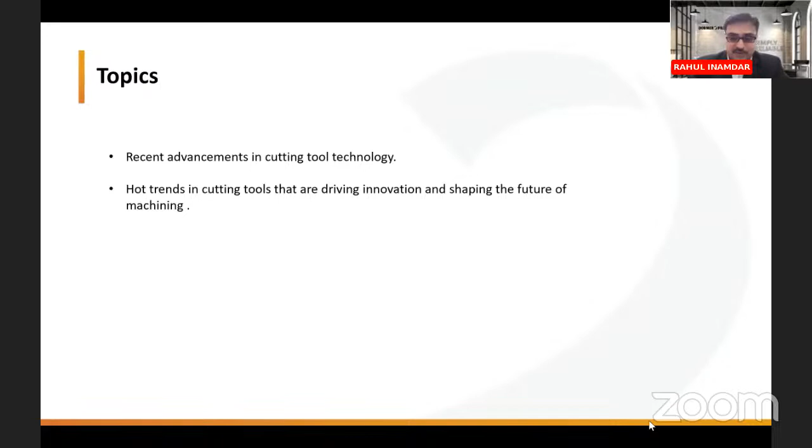I've been listening to our members who have already joined and co-panelists discussion, and it was so healthy basically when it comes to the Indian industry, growth and advancement. Today, without taking much time, I will talk a bit on the recent advancement in cutting tool technology, and also some of the hot trends right now ongoing in cutting tools hand-in-hand with machine tools, Arshad, with you.

When it comes to these two topics, let me directly jump into the advancement in cutting tool technology. Subhajit, what I see and what we all see right now, specifically when it comes to this zeitgeist of Atmanirbhar Bharat, Make in India, and also globally after post-COVID, industry really seeks development and innovation in the cutting tool, of course in the machine tool, but definitely in the cutting tool. When it comes to innovation or development, advancement in cutting tool comes down directly to the heart, and the heart is the insert, the carbide.

When it comes to the carbide, it is a great development from the historical age, when it comes to the grade, right from high-speed steel. There are three main desirable properties and factors which everyone looks upon for the cutting tool or for the insert: it should be high wear resistant, it should be higher in toughness, and at the same time it should have high hardness at high temperature, that means hot hardness. So right now in the industry, in the metal cutting world, what is happening?

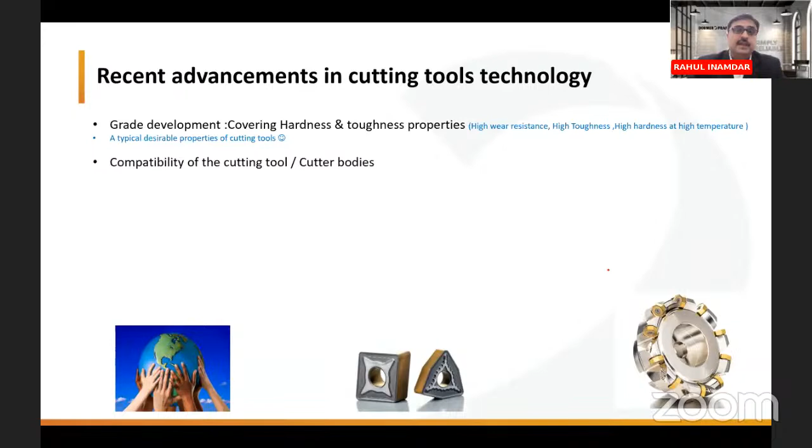But this advancement, this development and innovation, comes with one single cutter body - cutters, economical face milling, multi-edge as well, maybe 43-degree, 45-degree approach angle, but the same body contains square insert as well. That means we are talking about shoulder milling, multi-edge. So a single body contains a different shape of inserts, including the wiper cutting edge, the surface roughness values as well. This is another advancement.

When we say sustainability, then again energy saving is a topic now - kilowatt hour per unit. When the machine starts, when machining starts, the unit starts consuming kilowatt hours. This is what the Bureau of Energy Efficiency, BEE, data shows - in India, the power consumption in the manufacturing industry, when it comes to the production facility, is 83%.

83%, huge. And when it comes to the general facility in India, it is around 17% of the consumption. So 83% for production facility, isn't it too high? Yes, it is high. We need to do something. When it comes to machining, metal cutting, cutting tools, we have to come up - the tools now have innovation with low cutting force tools, different chip breakers, applying machining strategies with the help of CAM and machine tool manufacturers, optimization in cutting tool parameters.

This again correlates with grade development - high temperature withstanding capacity of the grade, the toughness carrying capacity of the grade, no matter turning, milling, or drilling. And then technological coatings as well, the geometry for the drills and so on, and approach with productivity. When I say approach with productivity, that means quick change, faster things - modular tooling. This is the advancement in cutting tool technology right now that we need to reduce the kilowatt hour in metal cutting.

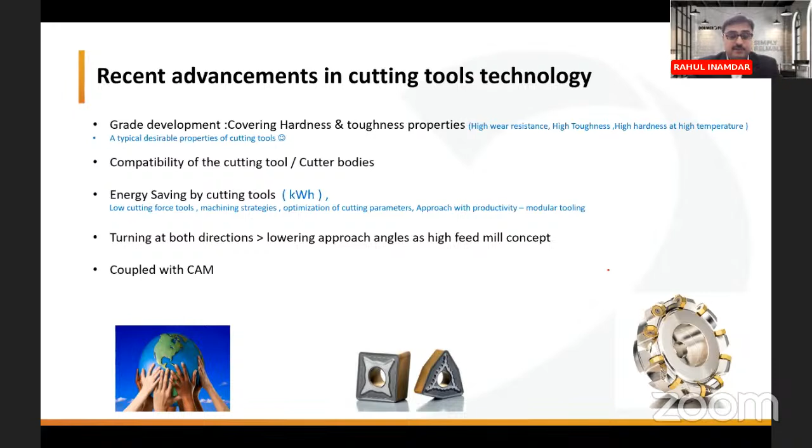Also, what advancement I see in metal cutting tools is again the micro drilling. Nowadays we are talking about the chips and micro drills and so on. And when it comes to micro drills, the machines and also the drill breakages as well we see.

What happens if we increase the feed rates or higher thrust force in the drill? So it comes with WC, tungsten carbide and cobalt based drills, which can carry higher temperature, that means higher cutting speeds, faster rate of drilling, double or triple the rate of drilling. Also getting the positional accuracies, the roundness, the geometrical accuracies, desired dimensional accuracies as well, and that too with the faster rate of drilling.

So typically what I see is the grade development, compatibility of the tools and cutter bodies as well in milling. Again, kilowatt hour reduction, that is a need.

I still remember in 2011, Japan hit by a high tsunami, and that had a blackout in Japan, in the main city of Tokyo. And the concept came from there. How about we reduce the units? How about we save energy, the power? And then it evolved in the cutting tool as well. And now it is under innovation, under advancement as well, even in small drills or carbide inserts.

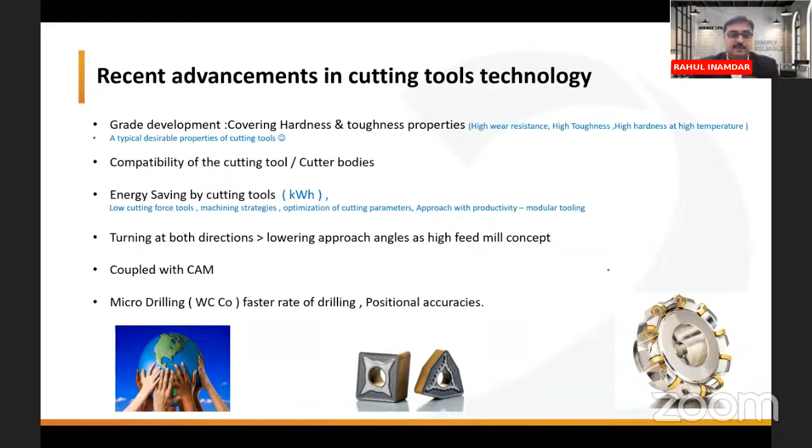Going forward, if I talk about some hot trends, of course panelists touched upon this. But again, Internet of Things integration, IoT, Industry 4.0, digitalization, that is very, very now coming up.

AI, the real-time feedback. A boring bar is doing boring, finished boring. But what we do not know outside the machine, the operator doesn't know what is happening with the surface roughness value. The operator doesn't know what is happening with the bore size, with the tolerances, the upper and lower limits, the CP/CPK values. We don't know.

This now comes with Bluetooth enabled sensor cutting tools, and this comes with a mobile app. Very easy, anyone can put it and check on the mobile app, check on the iPad or tablet and so on, or the monitor.

And then one can really monitor the operation, like boring. What is happening about the bore size? What is happening on the temperature? Is my cutting edge worn out, about to wear out? Then the sensor alarm will come up, and that means very high reliable machining. So this is what we say, trends are coming up when it comes to innovation and shaping the future of machining.

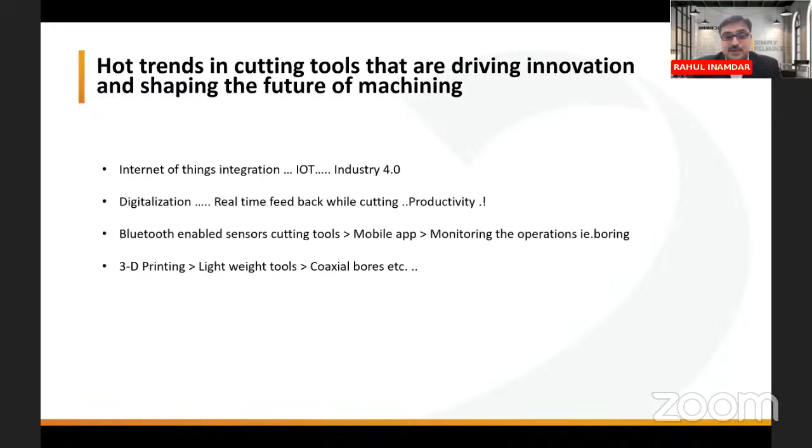So this industrial development and the faster rate of growth requires innovation, not only from cutting tools but machine tools, coatings, and so on. We are at the edge, stepping up, not doubling but going multifold going forward. It is happening, and it will happen soon again, multifold from the multifold.

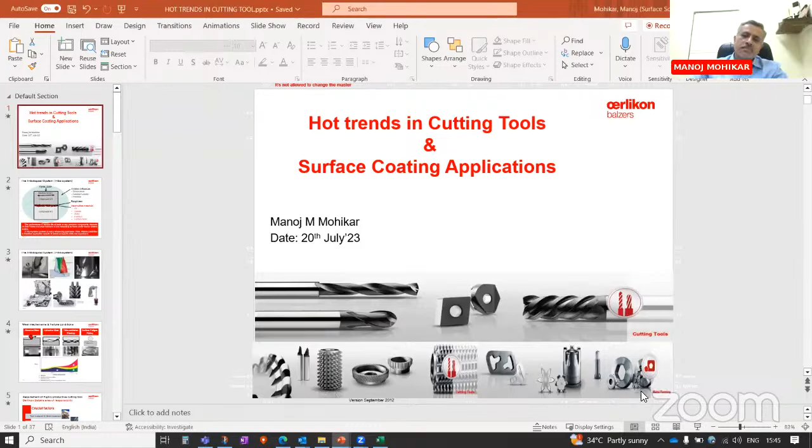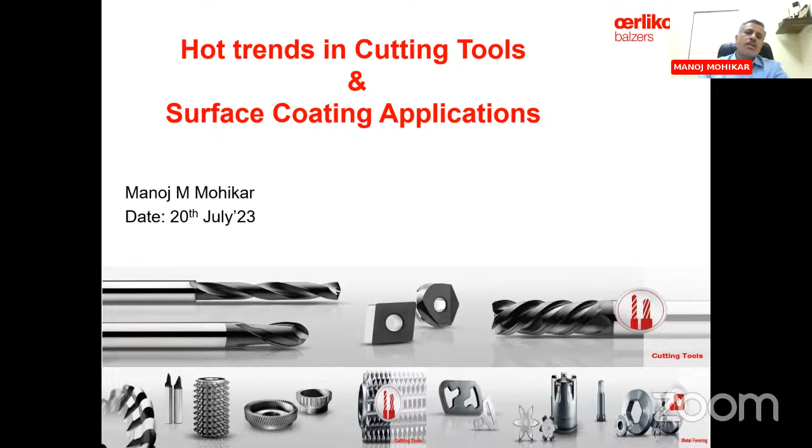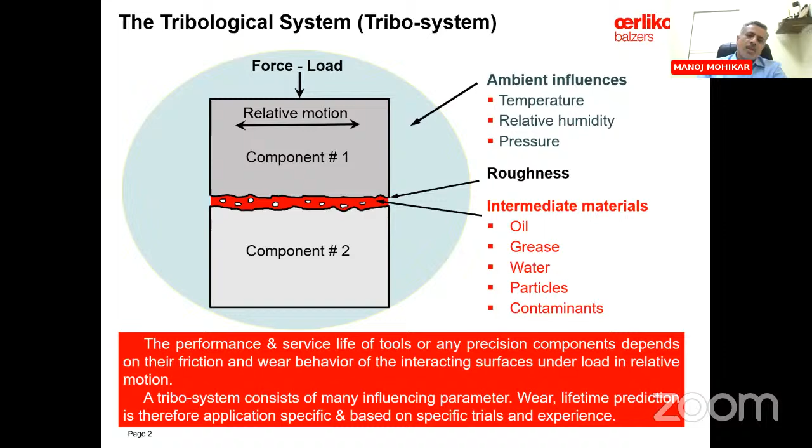So I'm just going through the latest trends happening in cutting tools as well as surface coating applications. Now basically, if we consider any machining application, it is basically a tribological system - a tribo system wherein the two mating parts have some relative motion with some force applied, and there are certain boundary materials like oil, coolant, air jet.

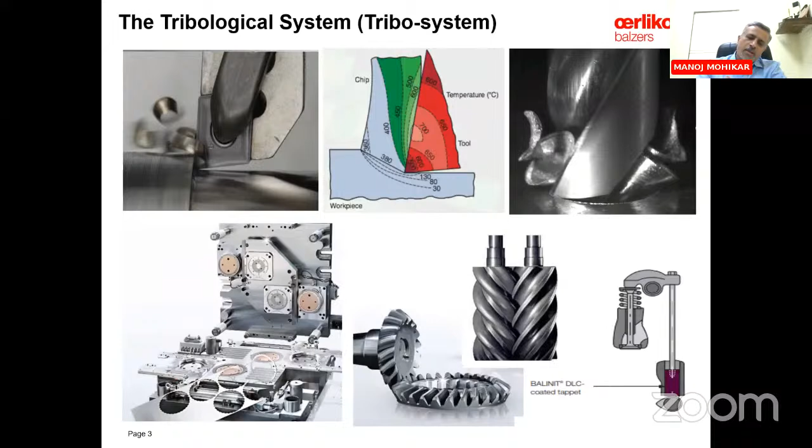These kinds of applications, the same system basically gets applied to machining. For example, it can be an insert and the turning component, or a drill and the component, or similarly it can be a sheet metal stamping application wherein the sheet metal and your punch and die - these basically form the tribo system. Similarly, any mating component in any engineering assembly is also a separate tribo system.

In this particular tribo system, basically we experience different kinds of wear. There are different wear mechanisms, like abrasion wear, adhesion wear, oxidation wear, because basically we are working at elevated temperatures. And there can be fatigue related stresses or diffusion related issues in the tribo system.

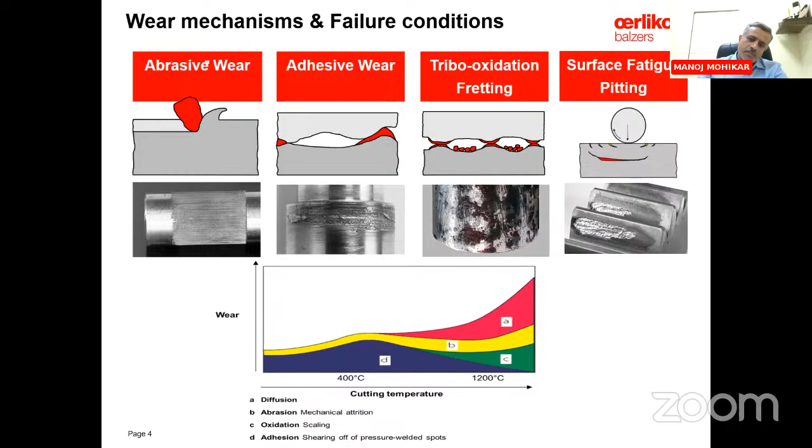Now, when we say we need a high productive cutting tool for the given machining setup, basically the crucial factors in the whole scenario are the tool material and related treatments, and the manufacturing production process for the cutting tool. This is basically taken care of by the scope of the tool manufacturer, like Dormer, Pramet, or Zeka.

As far as Oerlikon is concerned, most of my customers or viewers must be knowing we are into tool reconditioning activity and surface coating activity. So surface coating is basically our core dominant area, and related to coating, then the cutting tool surface or edge preparation, that also is part of this particular gamut.

And the last area is basically the process parameters, and this is typically at the customer end or the end user end - whatever machine setup he is having, whatever parameters they are using, the tooling setup, the clamping rigidity - all these things, when they are optimized, then basically we say we are getting into the high productive machining application.

Now, just for the viewers' purpose, most of drilling is 100% PVD process. In milling, 50% of the products are basically PVD - in fact it will be much higher compared to this percentage. And in turning, almost 80% is CVD, and the rest of the coatings are PVD. So Oerlikon Balzers, basically we are doing all the PVD coatings here in India.

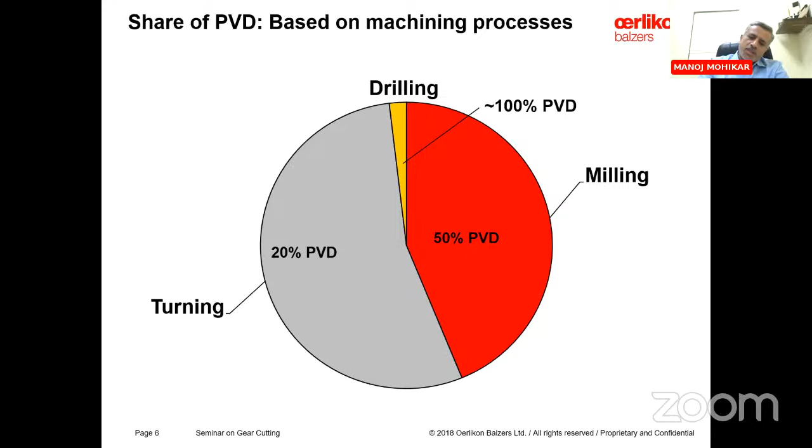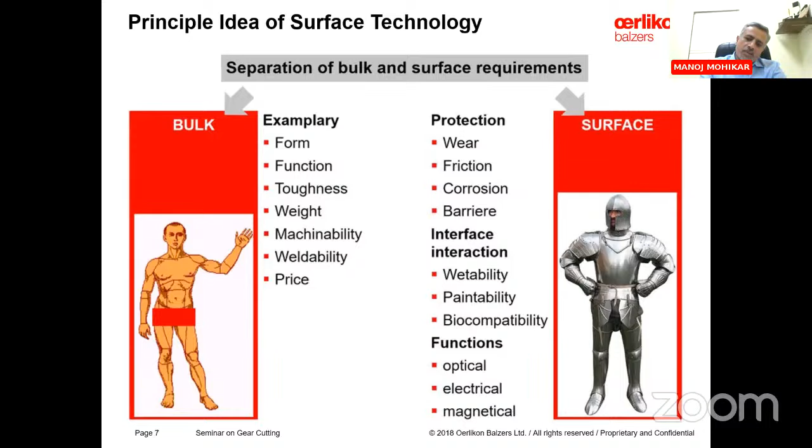Now, the basic purpose of coating - if we see the cutting tool material without any coating, it's a bulk body, we can say. And the coating we provide on this particular cutting tool is sort of armor on the cutting tool, which basically protects the cutting tool substrate from the various elements like wear protection, which is now reflected in this particular slide. So these are the properties which coating basically will enhance once it is applied on the substrate.

So in brief, basically the coefficient of friction - the moment we are adding coating on the substrate, it basically works as a good reduction for the friction. So your chip flow basically has good improvement.

Second is the oxidation resistance. It's basically nothing but, at the elevated temperatures, when you are machining at very high parameters, definitely the process temperature goes very high. So at that juncture, your substrate or even the coating material, that should not get oxidized. That is the property which gets enhanced with the coating. So there are certain coatings which have oxidation resistance up to 1100 degrees centigrade. And normally in any cutting application, the temperatures where the actual cutting is happening, it is varying somewhere in the range of 450 to 550 degrees centigrade.

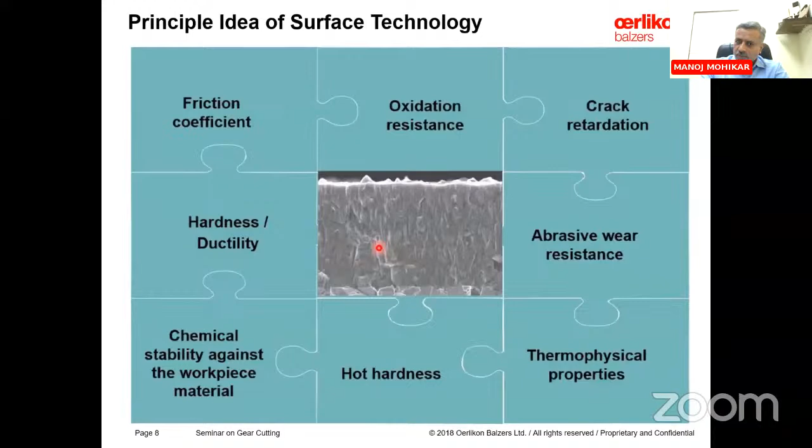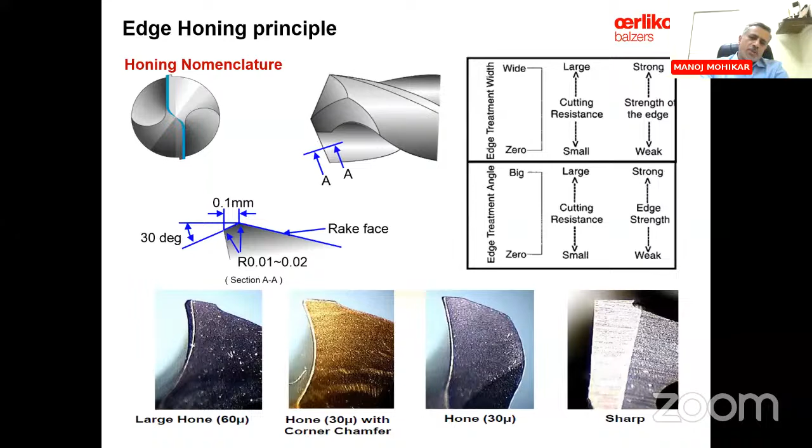Another area is surface preparation, which is equally important in any coating application, because if your surface is bad, it is not going to give good adhesion to the surface layer. As you are aware, all these surface coatings are typically less than 4 or 5 microns thickness, and there are certain coatings which are even half micron thickness. So surface preparation is equally important.

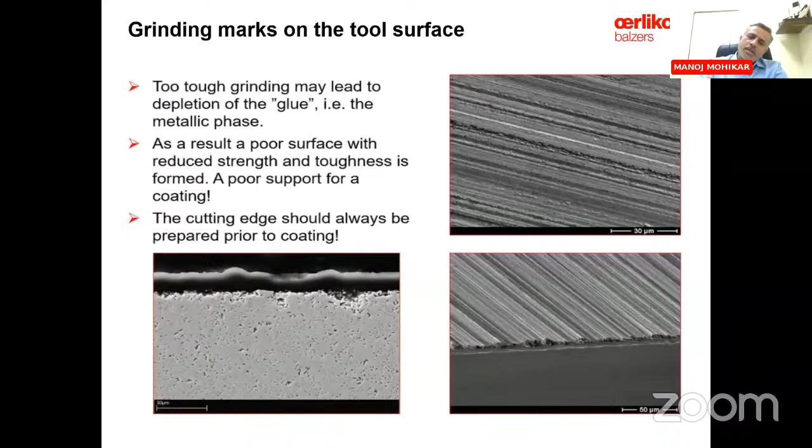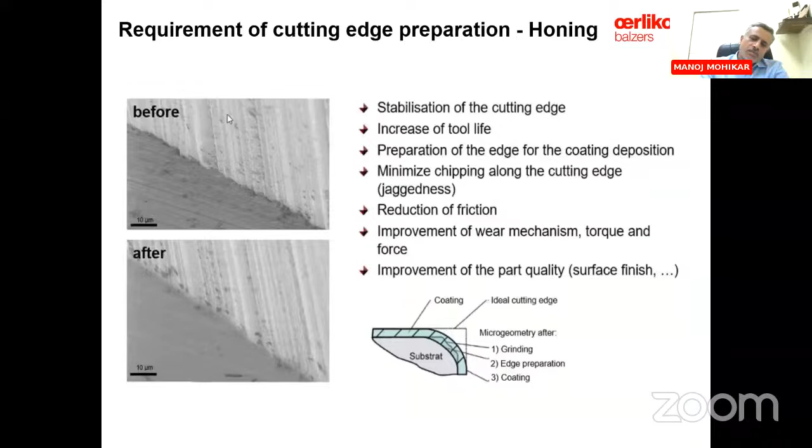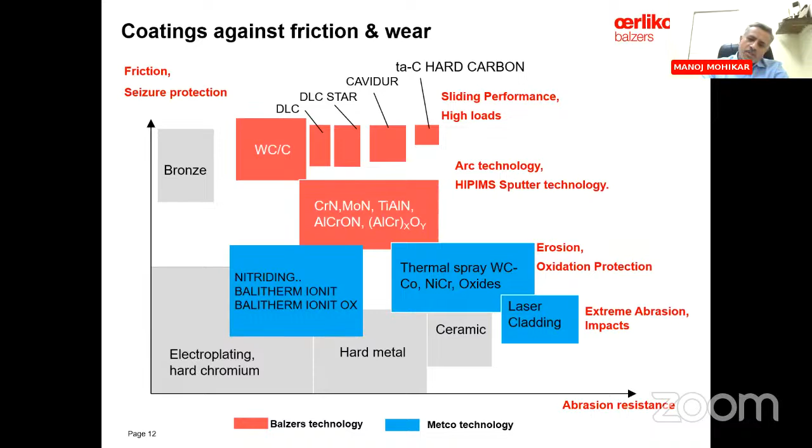And so is edge conditioning, which is nothing but the edge honing process we discussed in the previous slide. Now this is the entire range of coatings done on cutting applications. Typically the Balzers PVD coatings are for cutting tool applications. There are certain coatings more focused on reducing friction or seizure protection, certain coatings more on abrasion resistance, and certain coatings that combine both properties together. We will see these in detail in the upcoming slides.

This gives the entire coating structure we have at Oerlikon Balzers. Typically the carbon-based coatings are more for coefficient of friction reduction, but at the same time these coatings are also useful for all non-ferrous applications. In carbon-based coating, the highest hardness material is diamond, which has the highest wear resistance, and in between we have a number of coatings available which I will explain in the upcoming slide. Then there are coatings which are nitride based, and we have oxide based coatings. Here the typical process temperature ranges somewhere between 300 to 550 degrees centigrade.

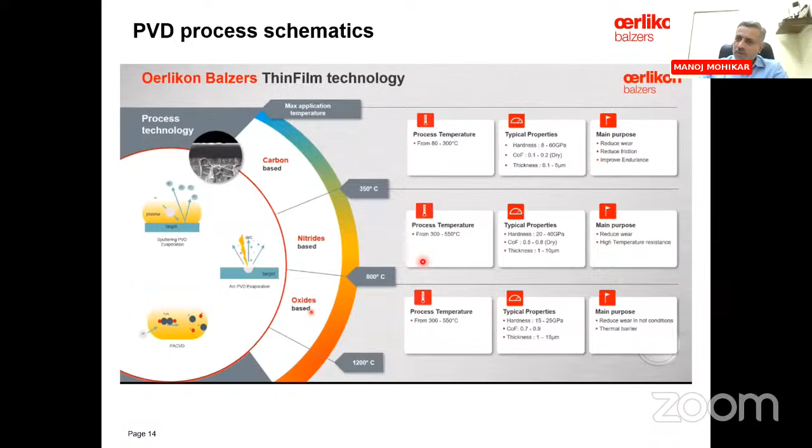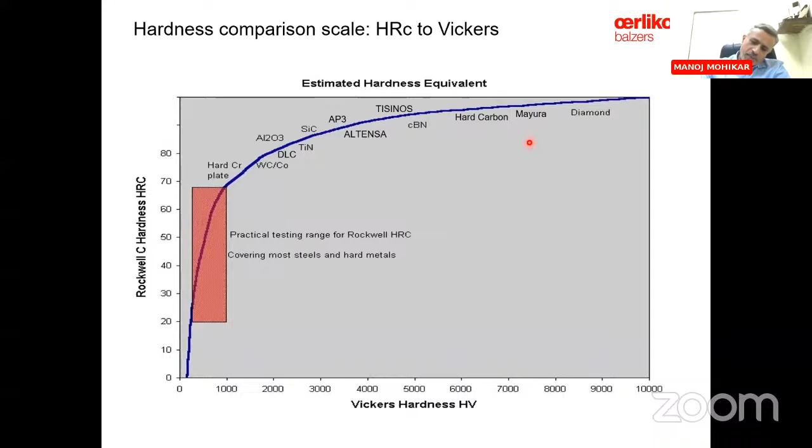Let us see the latest coatings now available for steel applications. For steel application, we have the platform named S3p, which is nothing but Scalable Pulsed Power Plasma, also called the BALIQ series coatings. In this particular coating, there were basically two separate processes for PVD coating: one was arc evaporation and another was sputter coating.

In arc coating, the advantages are high degree of ionization, so it's a very dense coating with very good adhesion. But finish-wise, this is not so smooth a coating. Whereas in sputter-based coating, the ionization level is low, so these are comparatively less dense coatings. But the advantage here is it's a very smooth coating, so the finish is very good.

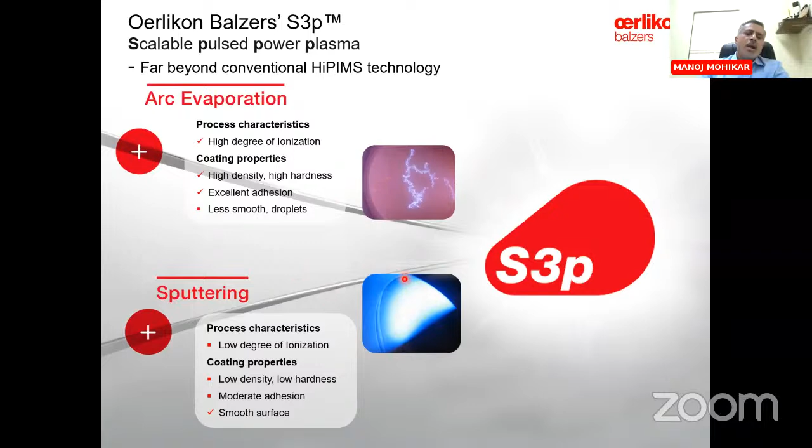So what we have done is combined both process advantages into the S3p, and this is what we get now. In carbide, we have seen microstructure improvements - initially it used to be coarse grain carbide, then we came up with fine grain, and now we have nano grain and micro grain carbides.

So the same improvement is now happening in the coating region. In coating too, whatever 3-4 micron layer we have, with this particular process we are able to improve the microstructure of the coating from very coarse to very fine level.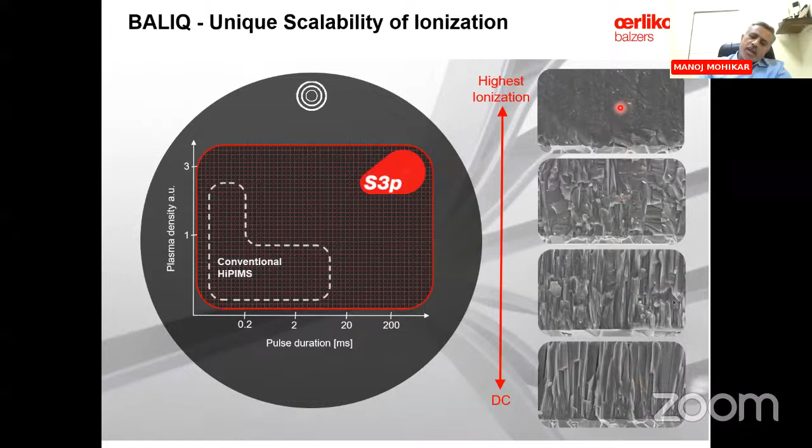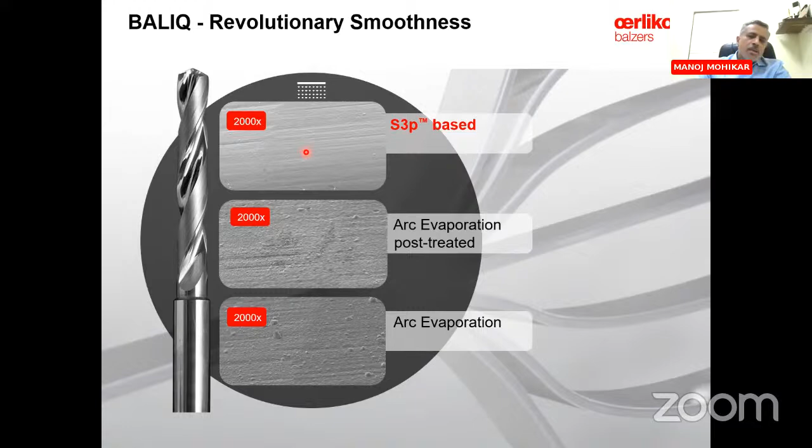Typically in micro tools below 3mm, this becomes a very important characteristic because the sizes are so small and the chip flow has to be better. This improvement helps tool performance, typically in micro drills.

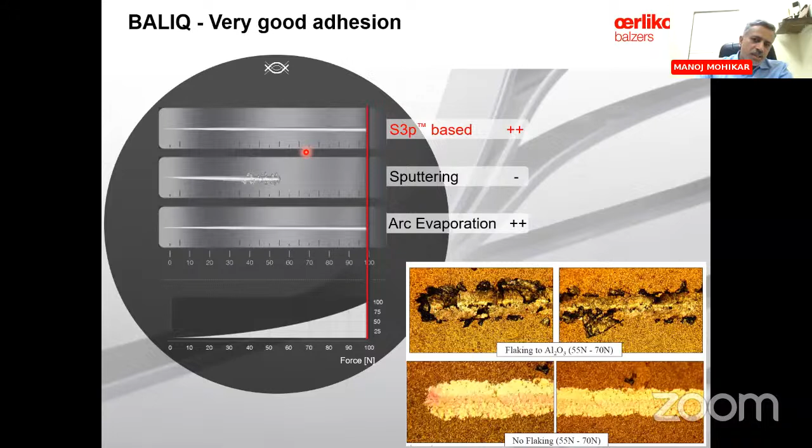Mr. Manoj, sorry to interrupt you. Yeah, sure. Yes, Shubhrajit? If you can just speed up. Sure, yeah.

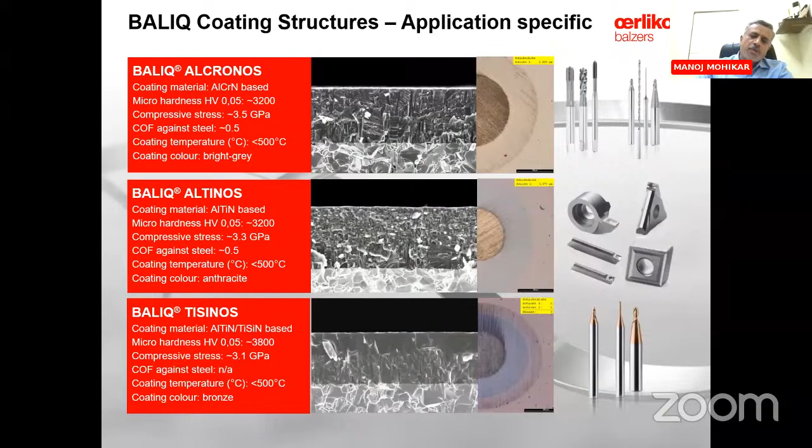Another point is wear resistance. These coatings are application specific - we have customized coatings. And the improvement, compared to regular coatings, is giving almost 91% improvement.

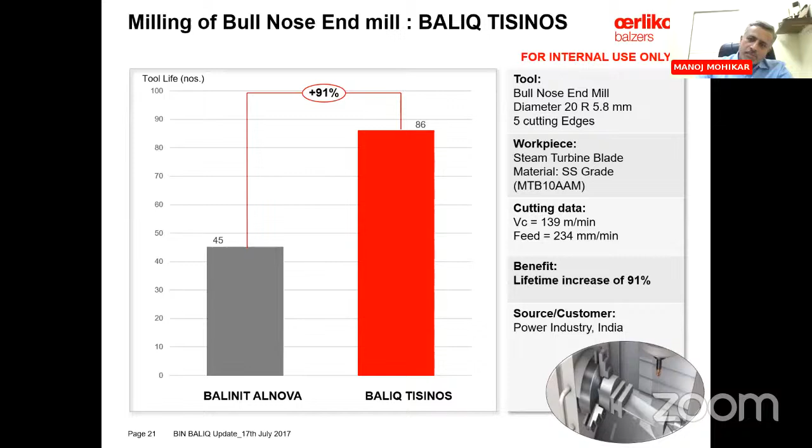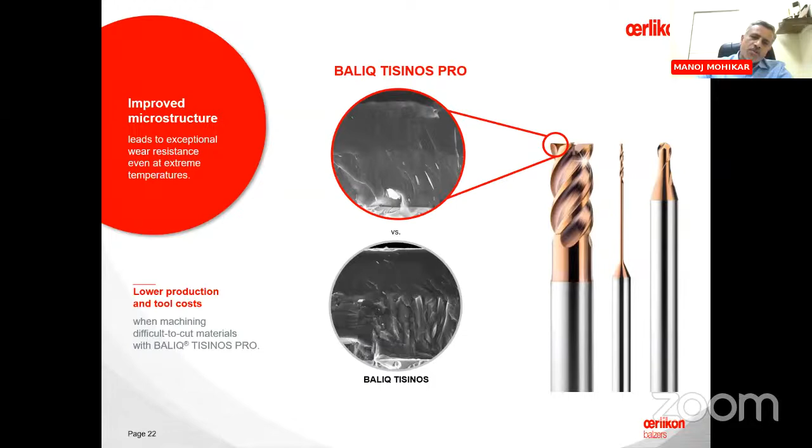Now we are launching the TISINOS Pro coating, which is a further improvement. This gives almost 50 to 60% improvement over the earlier TISINOS coating.

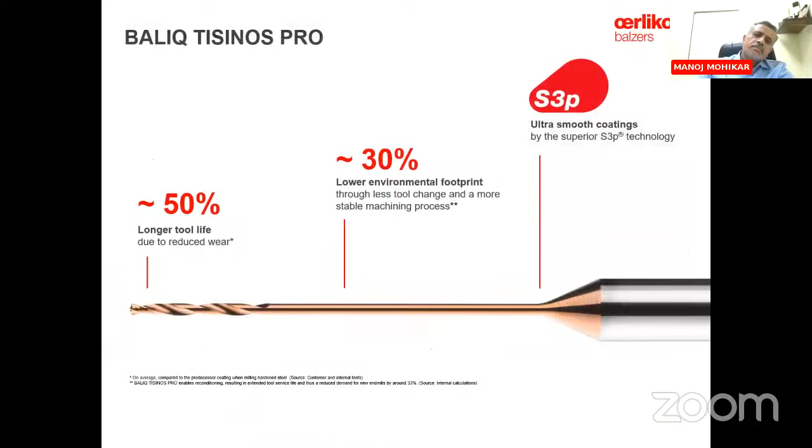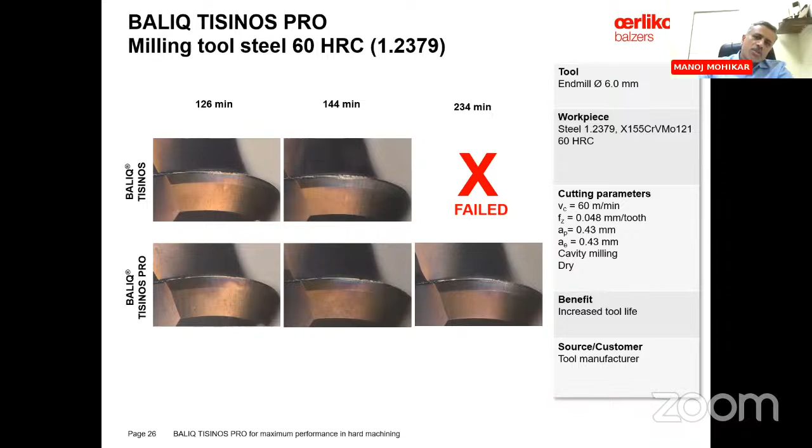So these are a few wear photographs, which show very minimal wear on the cutting edges.

Then comes the non-ferrous machining zone. Here too, there are different application-specific coatings. For non-ferrous, we basically have carbon-based coatings.

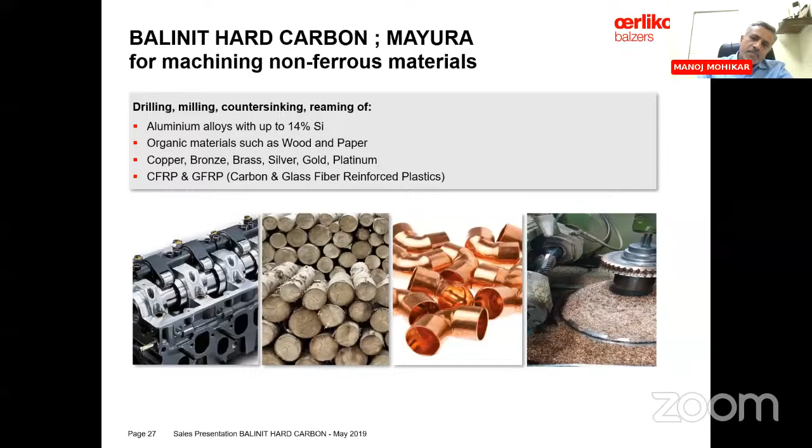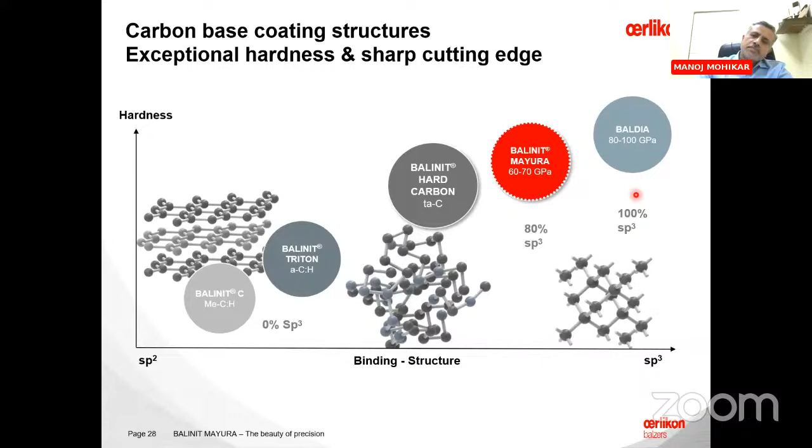So this is the structure going from amorphous grade to crystalline structure, and the coating is basically hard carbon, the Mayura coating.

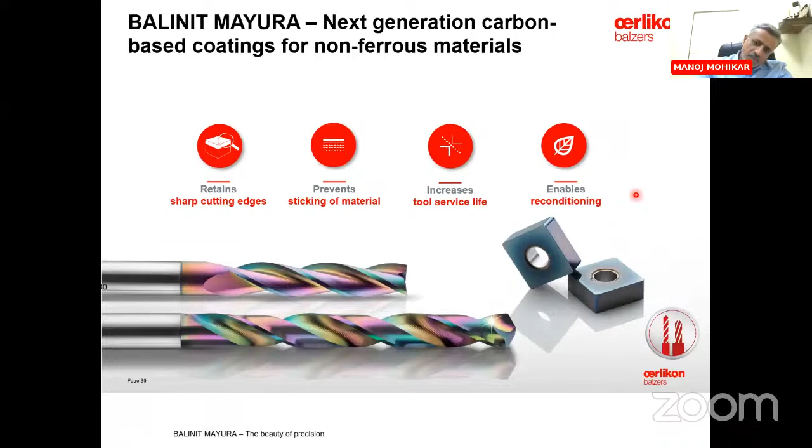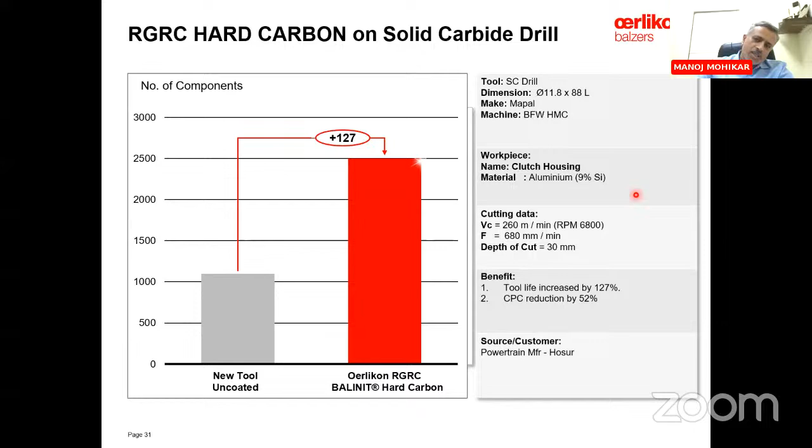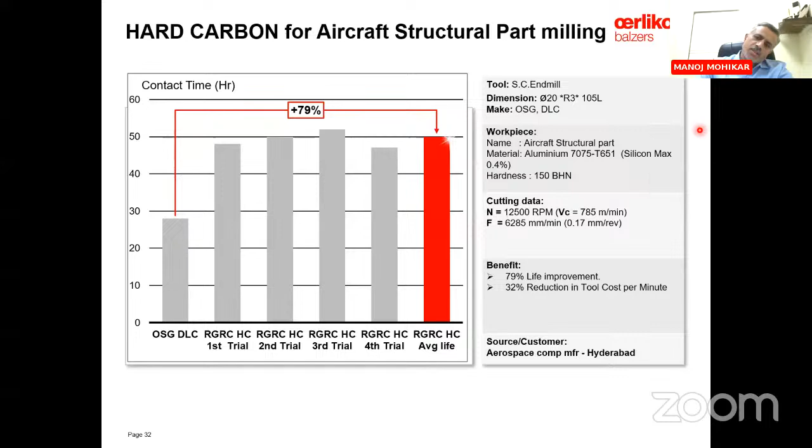If you see the results from uncoated to coated, it straight away gives a 100% kind of improvement in non-ferrous applications. Even for aerospace grade application, it gives good improvement, almost 80% improvement, where the silicon content is less than 0.4%.